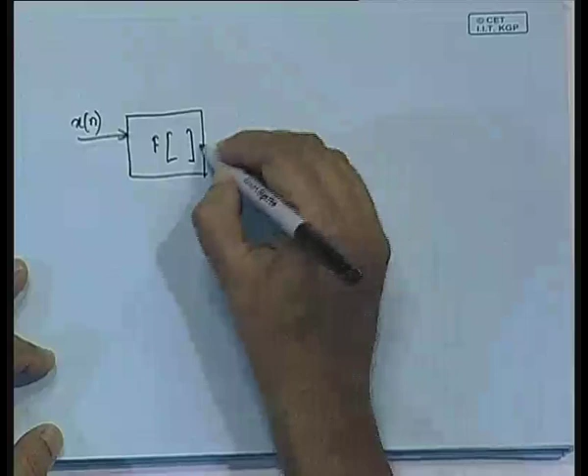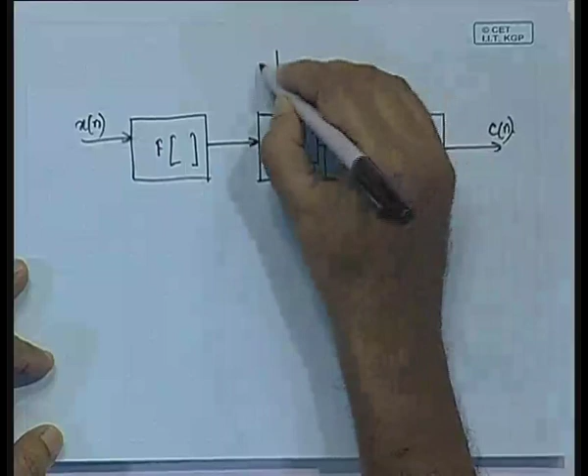So now we are going to have another logarithmic encoder decoder, but where the transfer characteristics is slightly altered. What we have is some kind of block diagram like this, where the input will be xn, and then we will be having a transformation function which we call f, which will be a logarithmic function basically, followed by the quantizer which we are calling the q function, and then we follow it up with the encoder, and the encoded output will give us C of n, and there will be the step size. So the step size, which is delta, will be controlling both the quantizer as well as the encoder.

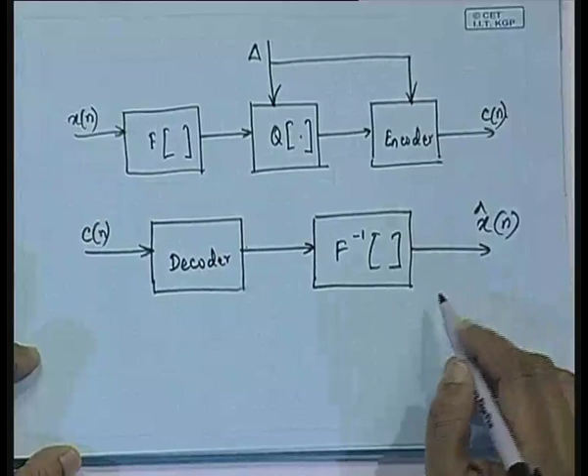And in fact, the corresponding decoder will have input Cn, followed by the decoder, and then we are going to have the inverse transformation. So whatever f we are using, we have to use f inverse of this, and that will generate x cap of n, which is going to be our reconstructed signal. So x of n is the original input, and x cap of n is the reconstructed output at the decoder end.

So now we have to see what f function one can use instead of using the direct logarithm. Earlier we were saying we will be using log of the modulus of xn, and we will also be deriving the sign of xn, but instead now we are going to consider a function which will take care of the deficiencies like utilizing the dynamic range as well as the approximation to the logarithmic characteristic.

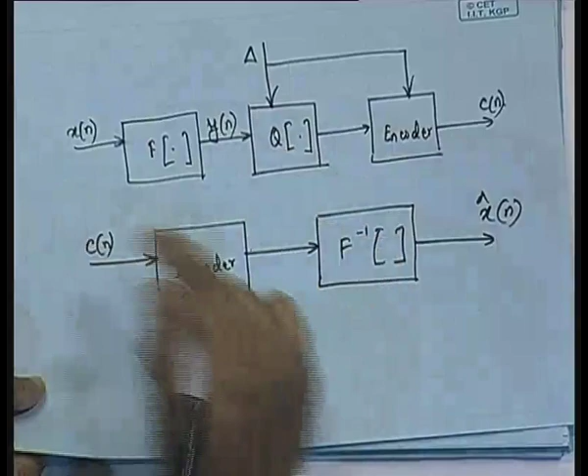So the transformation f that we design is like this: we say y of n will be nothing but the output of this f. We write y of n as f of xn, and this is given by x max, which is the maximum possible amplitude of the signal, multiplied by log of 1 plus mu into mod of xn divided by x max, upon log of 1 plus mu, and this multiplied by the sign of xn, where sign of xn equals plus 1 if xn is positive and minus 1 if xn is negative.

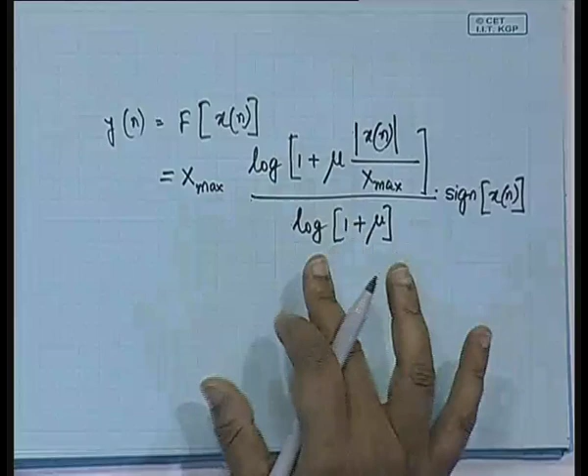So this is the expression, and this is actually called the mu law. So as per the mu law characteristic, the transformation f would be like this. Now you can examine this equation: yn equals x max multiplied by this expression. Let's call that equation 1, and you can see that if we substitute mu equal to 0 directly, we get a 0 by 0 form.

So if we mathematically manipulate that by taking the derivative of the numerator and the denominator, what we derive is simply this: for mu equal to 0, we get yn equal to mod of xn into sign of xn. The x max term gets cancelled ultimately. There is one x max term here and another x max term here, and this x max term will ultimately come to the denominator. So you will be left with mod of xn multiplied by sign of xn, which is nothing but xn. So yn is equal to xn.

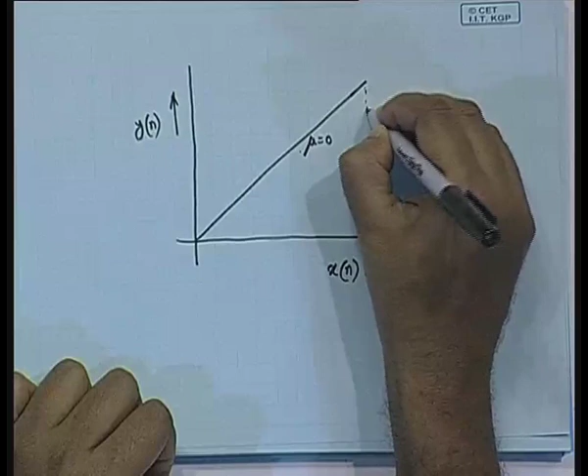So at mu equal to 0, the characteristic that we will obtain if we plot yn versus xn will be a completely linear characteristic passing through the origin, with a 45-degree slope. So if you are plotting xn values in this direction and yn values in this direction, then yn is going to be equal to xn. This is the curve we will have for mu equal to 0. So somewhere at this point, let's say we have the maximum possible value of xn, that is x max. So when xn is equal to x max, likewise yn also will be equal to x max according to this.

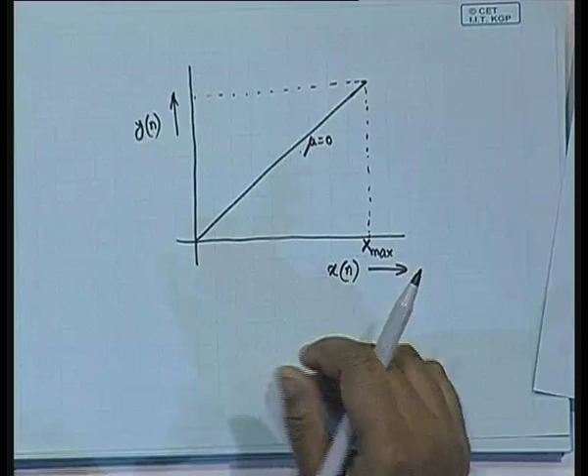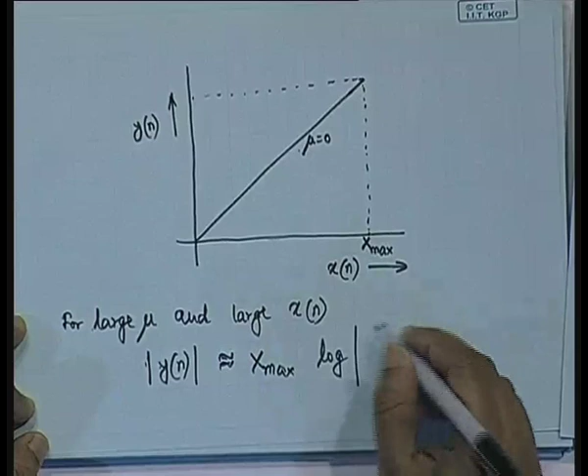Now if we go by this equation and try to plot the yn versus xn curve for different values of mu, we will be obtaining it like this. This was for mu equal to 0, and we can go to another extreme, that is for very large mu. For large values of mu, if we plot this equation, and also take the larger value of xn, meaning xn closer to x max as compared to xn closer to 0, so when we take large mu and large xn, this gives rise to an approximation in the value of yn, and we can write that mod of yn is approximately equal to x max into log of mod xn upon x max.

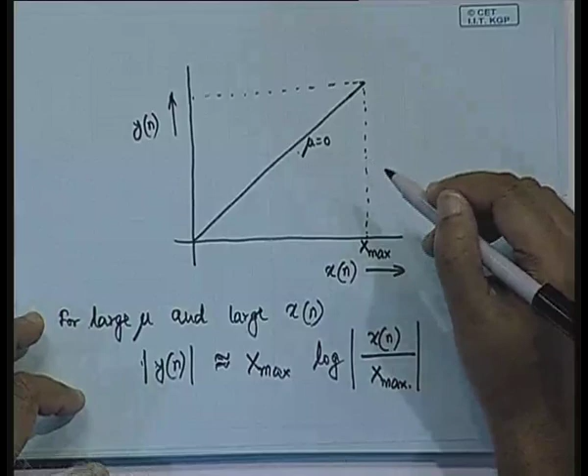So this is for large mu, and if we directly go by the plot corresponding to equation number 1, we will obtain characteristics something like this: for increased value of mu, what do we expect? Should the curve be like this or should it be like this? Because this will approximate the logarithmic characteristics more, so this will be upward. So we will have a characteristic like this for, let's say, mu equal to 5, which may lie above the mu equal to 0 characteristic. Mu equal to 0 is actually the case of no compression. There is no signal compression happening, because whatever is the value of xn, yn has the same value. Whereas here, for these values of xn, the incremental change in yn is much smaller.

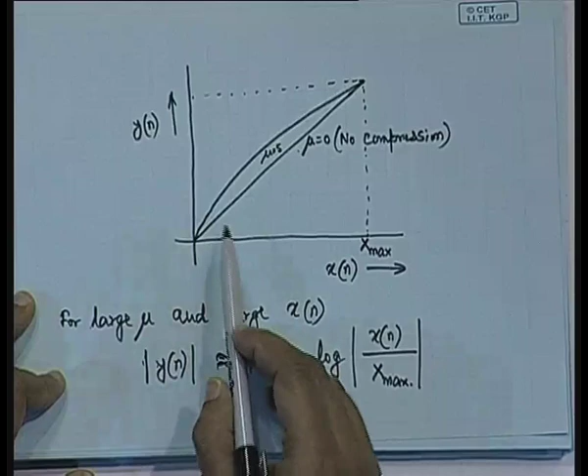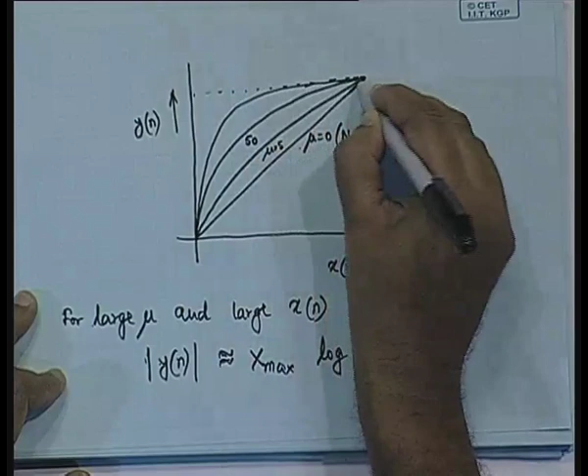And if we increase the value of mu further, we will observe a characteristic like this. So for mu equal to 50, we may observe a curve like this. For mu equal to 255, we may have a curve like this. So for large values of mu, we will have curves like this. This is a typical characteristic that we obtain, this is x max, for yn versus xn for different values of mu.

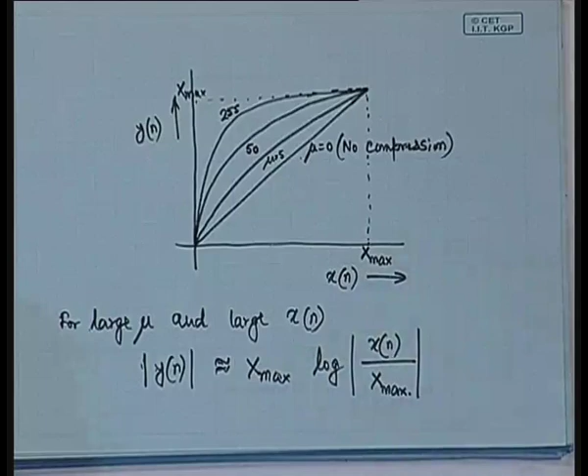Now in terms of the characteristics, one can observe that if we plot the value of x cap n versus xn — x cap n meaning at this point, when we quantize it — so this was yn, after the transformation, and after the quantization we call it x cap of n. So if we plot x cap of n against xn, plotting xn in this direction and x cap n in this direction, we will observe a nature very similar to what we just showed for yn versus xn, because it is ultimately yn which gets quantized, not xn directly.

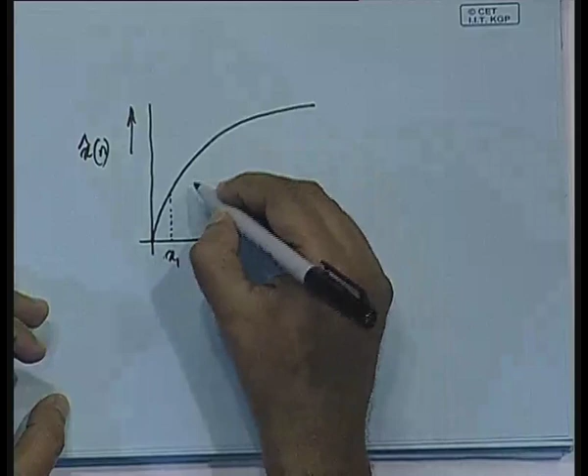And for different values of xn, corresponding to the decision levels — if we mark the decision levels corresponding to xn, we will observe, suppose this is x1, this is x2, this is x3, and this is the value of the ultimate x max.

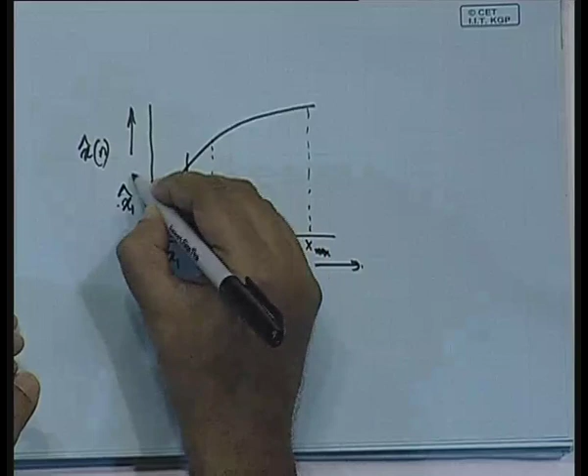Okay, and we will be observing that the value of x cap would be something like this. Here we will be observing the x1 cap. So x1 cap would go like this, and then we will be observing this to be the x2 cap. This will be the x3 cap.

Then we will finally be having some more intermediate levels like this, but let us say it is just having 1, 2, 3, 4 levels on this side. And in fact this will not be 4 level, this will be 8 level.

Why 8 levels? Because the signal is a bipolar signal. So x of n can have samples which are positive, can have samples which are negative. So the actual range will be minus x max to plus x max.

So since we are having 4 levels in this example corresponding to the positive signal, we will correspondingly be having 4 levels for the negative signals as well. And this characteristic will be

antisymmetric about the origin. So if we just make an antisymmetric version of this curve and then we plot x cap n over its range from minus x max to x max, and just extend the characteristic in the negative direction with antisymmetry, then what results is 8 different quantization levels. That is what we will be obtaining.

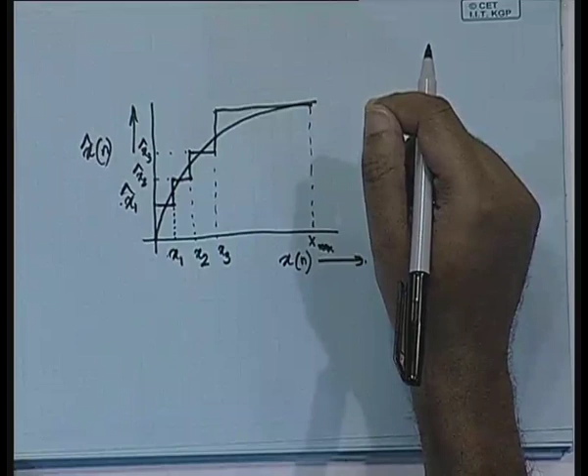So now with a characteristic like this, when we have x cap n versus xn being plotted this way, now we can derive the expression for the signal to noise ratio in a manner very similar to what we did earlier for the uniform quantizers.

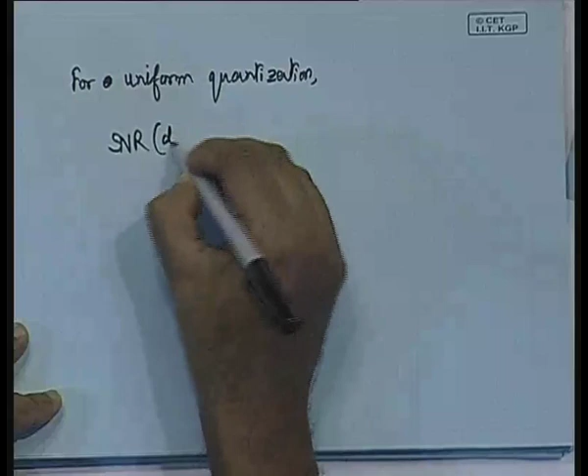For uniform quantizers, as you remember, we had obtained the signal to noise ratio, which I am just reproducing for your reference: the SNR in dB was equal to 6B plus 4.77, minus 20 log to the base 10 of x max divided by sigma x.

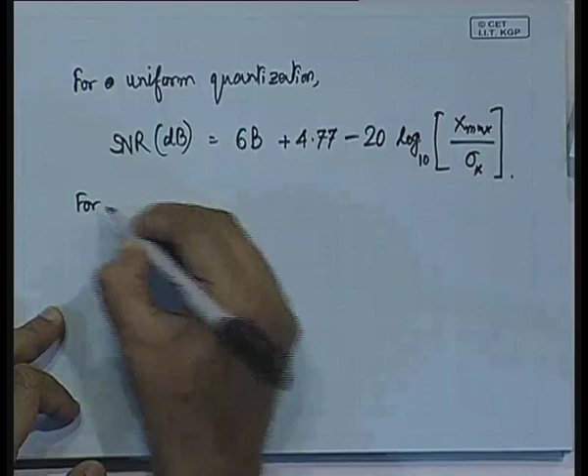And for mu law quantization, what we are describing here, if we are following a similar derivation approach, then one observes the SNR in dB to be like this: SNR expressed as dB is equal to 6B plus 4.77. So up to this the terms are equal, but not beyond this.

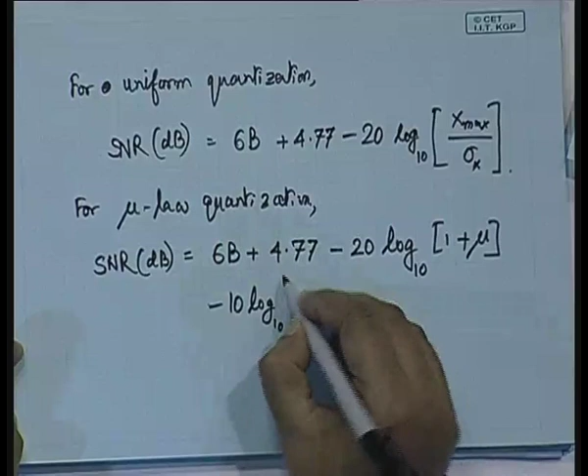After this there will be a term that is 20 log to the base 10 of 1 plus mu, minus 10 log to the base 10 of 1 plus x max upon mu sigma x, this term squared, plus root 2 into x max upon mu sigma x. So this is going to be the total expression.

So you can compare these two equations, and here you will find that in the uniform quantizer case there is a direct term, 20 log of x max by sigma x. In fact this is the term which we criticized, because we said that if sigma x happens to be small, if the ratio of sigma x by x max happens to be small, then we are going to have a reduction in the signal to noise ratio.

Now, in this case also there is a reduction. Firstly, there are two terms which are contributing to the reduction. One is this minus 20 log of 1 plus mu, but for a particular design of the quantizer, mu is fixed, so this is a constant quantity which will be subtracted. We are not bothered about that, but we are more bothered about the term that is signal dependent, the sigma x term.

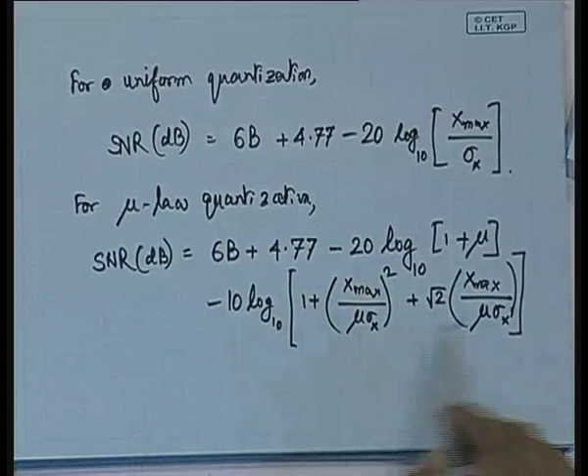So you can see that x max by mu sigma x, this is squared, so if this is a small quantity, it is further reduced, and this term is much less sensitive to this variation in x max by mu sigma x. In fact, mu also happens to be a larger quantity, so as a result of this, the term that is going inside this logarithmic argument is not very sensitive.

As a result of that, if we plot the signal to noise ratio against the quantity x max by sigma x, we will be finding much less variation for one case, whereas in the other case we will be observing a fall, although it is a logarithmic fall. So now it's better to plot the two situations, that is uniform quantizer and mu law quantization.

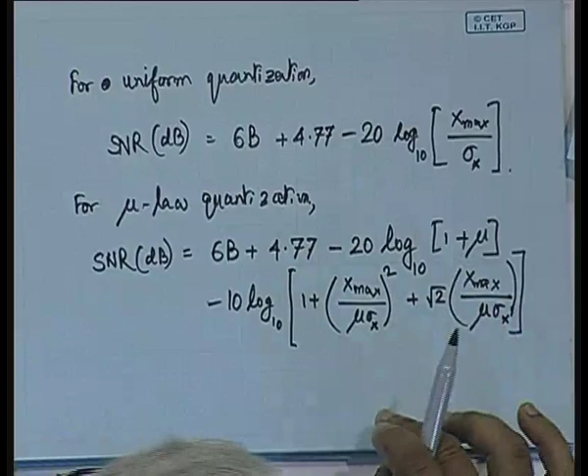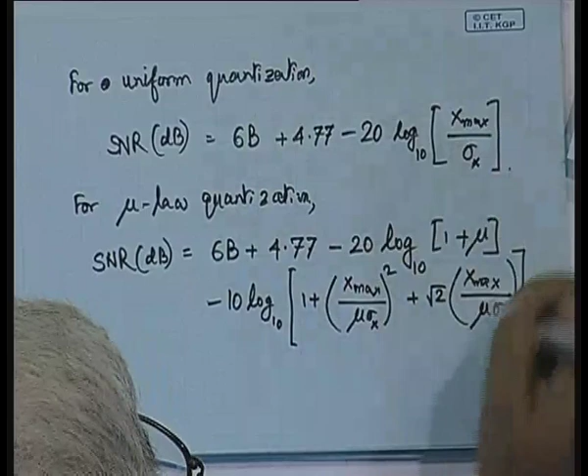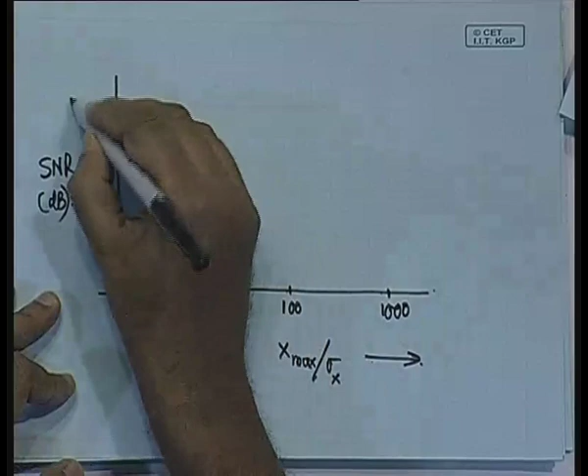So we will be having, let us say here we have 100 and here we have 1000, because we are going to plot it in the logarithmic scale. So x max by sigma x is plotted like this, and the SNR is plotted this way. Then we will be having, for b equal to 5 let us say, you see that it is still dependent upon b, the number of bits.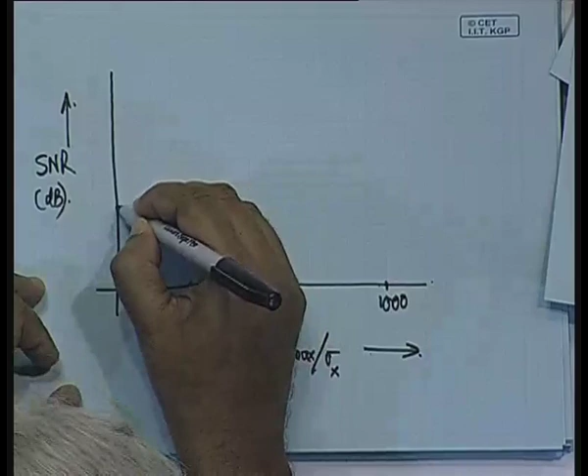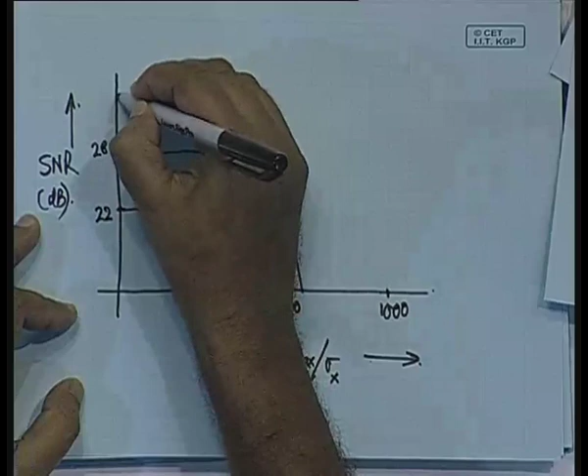Here it is 22, and we can see that it is like this. So this is for b equal to 5, and then we will be observing that b equal to 6 would be something like this. This is for b equal to 6, and for b equal to 7, this starts from 34 dB onwards, and then we are observing it like this.

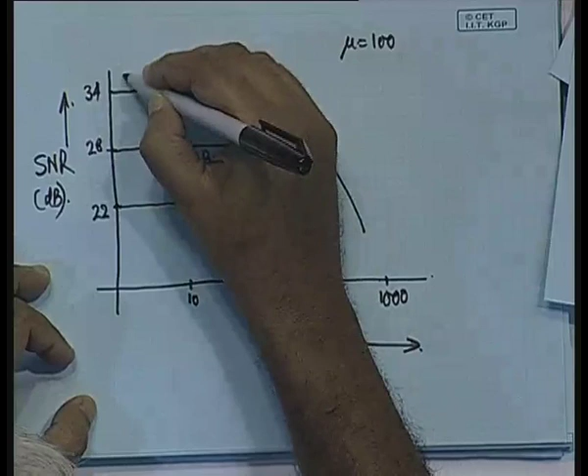So this is for mu equal to 100, and we can see that the variation is something of this nature, for b equal to 5, and then for b equal to 6.

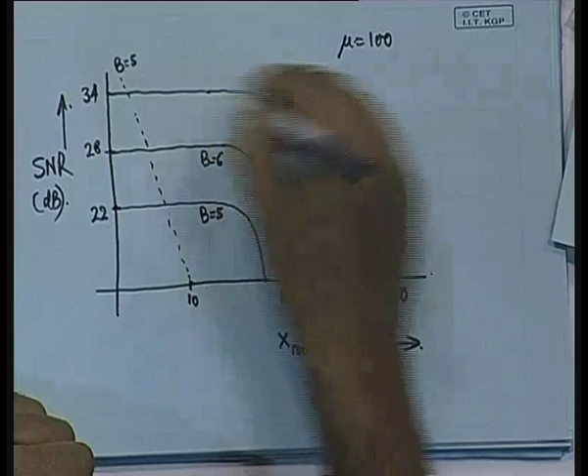So this is for the case of uniform quantization. This will be the characteristic for b equal to 7. And these solid lines are all for the mu law, while for the uniform quantization, again because we are plotting in the logarithmic scale, and the expression of SNR also is logarithmically changing, we can expect a straight line for the uniform quantization.

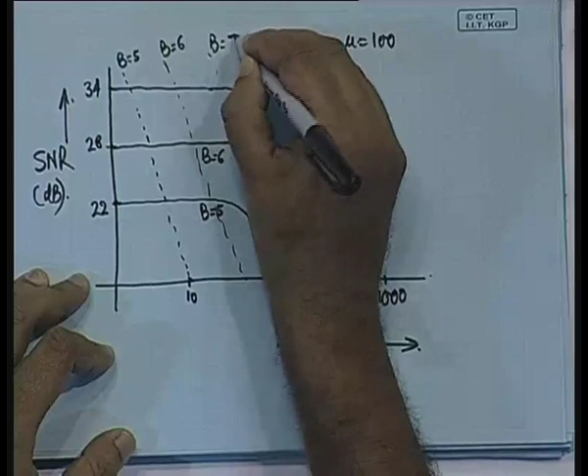So you can see that the b equal to 5 characteristic would be like this, and b equal to 6 characteristic may be like this. B equal to 7 characteristic could be like this, and b equal to 11 characteristic could be like this. So all these dotted lines are for uniform quantization.

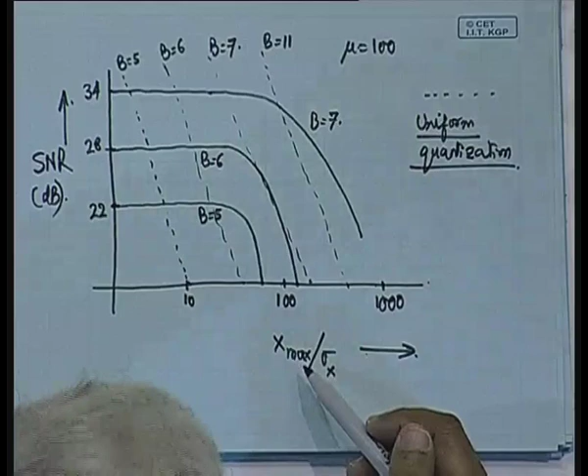So now, what is the conclusion we can draw out of it? For a lower value of x max by sigma x, meaning the value of sigma x is closer to x max, meaning for very large signal variance, we can see that the uniform quantizer is having a much higher value of signal to noise ratio. It's having a much better SNR. Just look at this point.

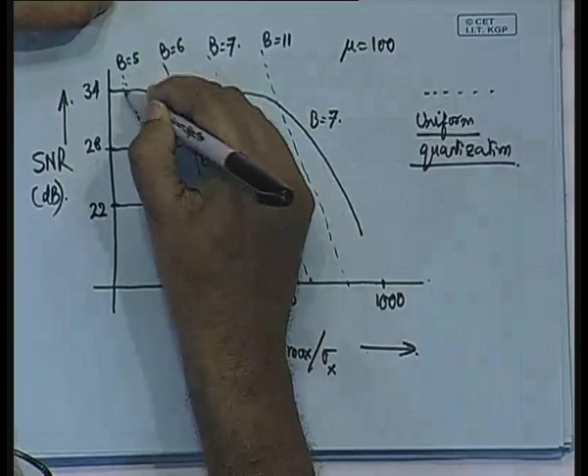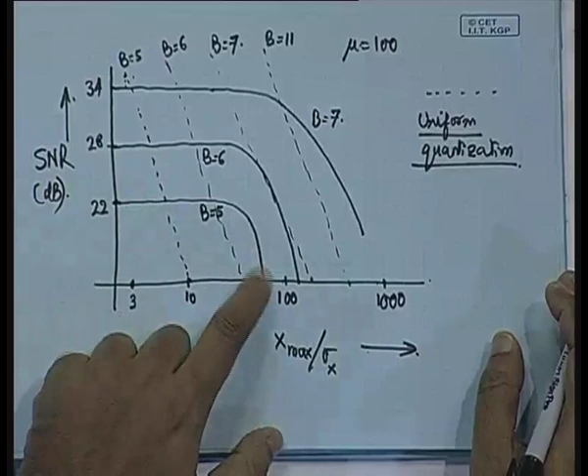Here for b equal to 5, and for a very low value, maybe 2 or 3, of x max by sigma x over here, you can see that the b equal to 5 curve happens to be at a much higher level as compared to the b equal to 5 curve for the mu law. So definitely it leads to the conclusion that this is better.

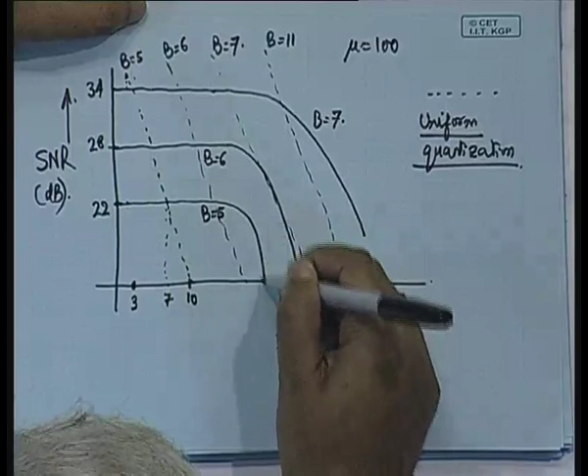But again, for the variation of sigma x, once it crosses this point, maybe this is with x max by sigma x at a value of 7, and beyond that we find that this uniform quantization curve falls rapidly. So in this case for b equal to 5, the mu law characteristic gives a much better SNR, and it is more or less constant. It is only beyond a certain stage that for further larger values of x max by sigma x we find a fall off.

In fact, this is quite expected also from this equation. Look at this equation, that if x max by mu sigma x happens to be sufficiently large, only then will there be some fall in the characteristics. So this is what is happening for the mu law quantized version.

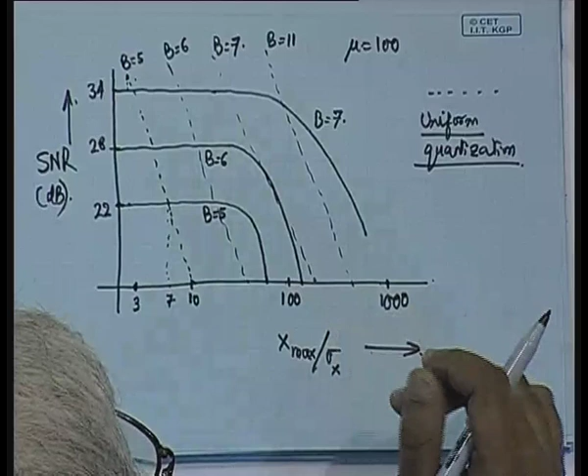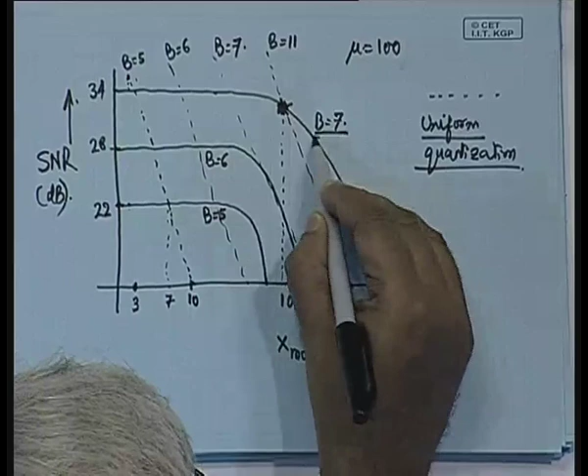Very interestingly, for a reasonably higher value of x max by sigma x, which is typically expected, you can see that near about 100 we are finding that the SNR is almost the same. Whatever value we are expecting with only 7 bits for mu law, we are having the SNR equal to that of b equal to 11.

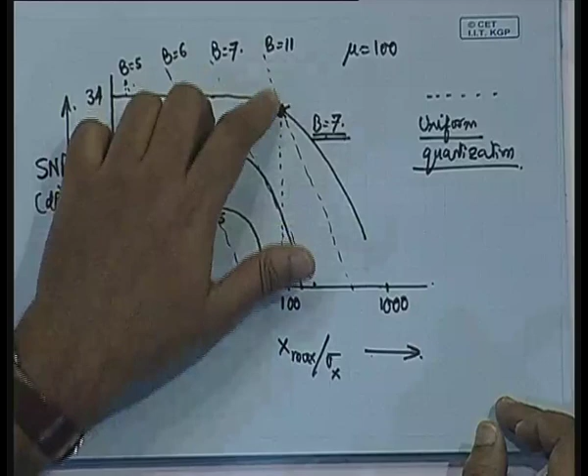This suggests that for the case of mu law, we can go in for much lesser number of bits as compared to what we will be doing for the uniform quantization.

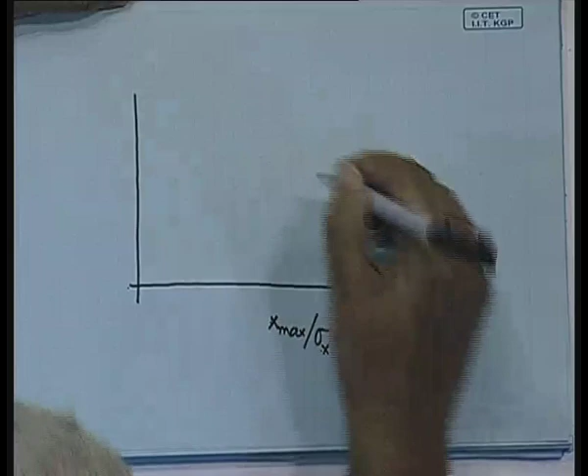And then we can have a very similar plot for a higher value of mu. Let's say that we plot the same thing for mu equal to 500, and in that case, what are we going to obtain? So this is for mu equal to 500.

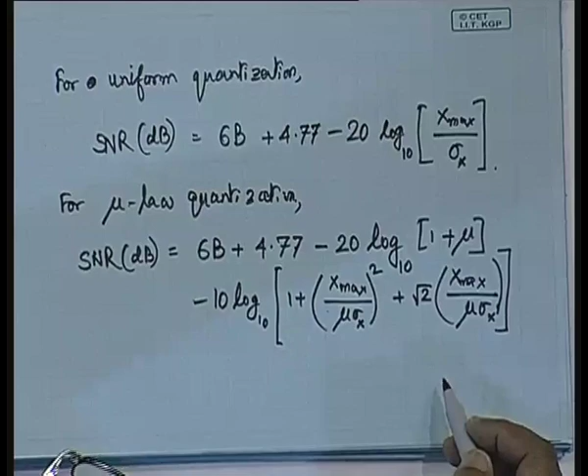Now look at this equation and tell me that if the value of mu is higher, instead of 100 if we make it 500, what would you expect out of the SNR value? SNR will drop down. Going by this equation, the SNR will drop down. From 100 to 500, using the actual values, we will find that the SNR drops down by nearly 2.5 to 3 dB.

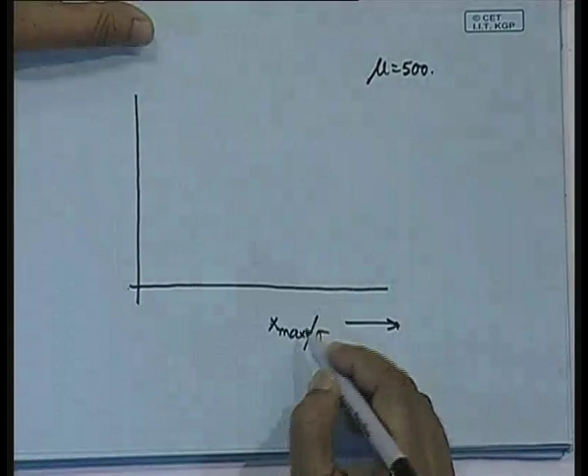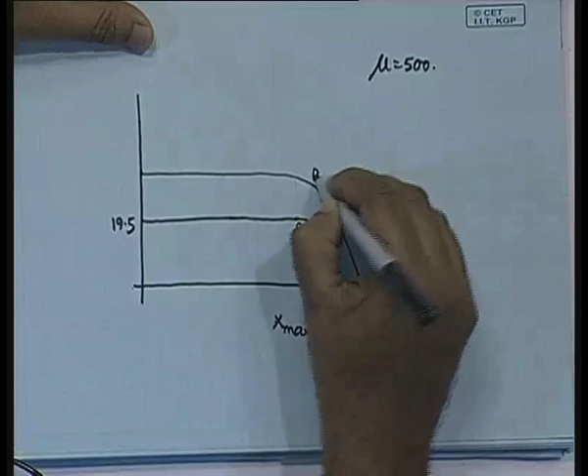So here we will observe that it will be at 19.5 and then it drops down much later. This is for B equal to 5, and for B equal to 6 it would be like this. For B equal to 7 it would be like this. The values, instead of 22, has come down to 19.5; here this has come down to 25.5 dB; and here it has come down to 31.5 dB. A uniform drop of 2.5 dB has happened.

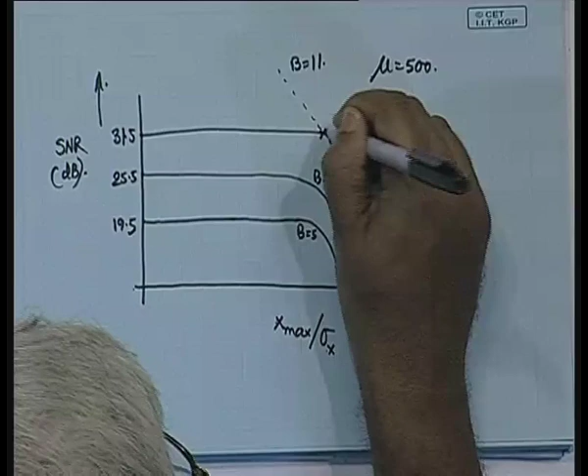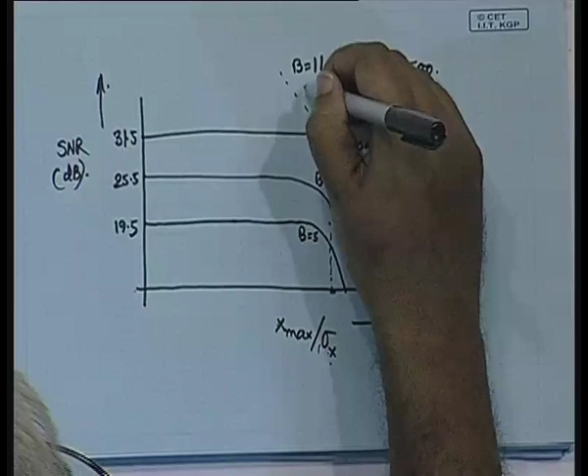And then again, for B equal to 11, we can see that the characteristic makes an intersection at this particular point, which means that beyond this value of x max by sigma x, we are going to find that mu law gives us a better characteristic. In fact, it won't intersect at two places, it will be something like this, not exactly what I have shown. So beyond this value of x max by sigma x, we find that mu law is going to perform better, whereas for smaller values of x max by sigma x, the uniform quantizer is going to perform better.

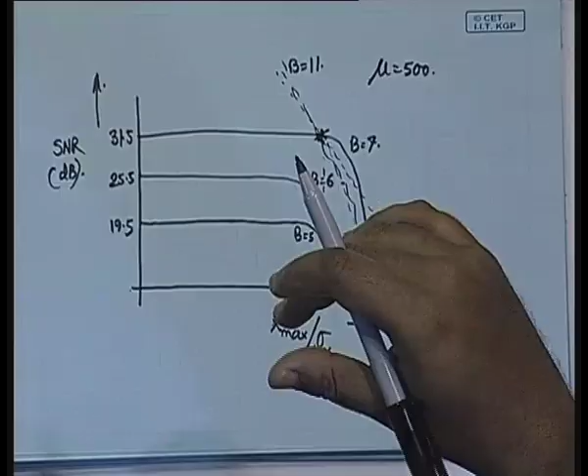But this means to say that although we may be having a better signal to noise ratio for the uniform quantizer case, and the signal to noise ratio in this case suffers somewhat, the nature of the characteristic being totally uniform with respect to this helps a lot.

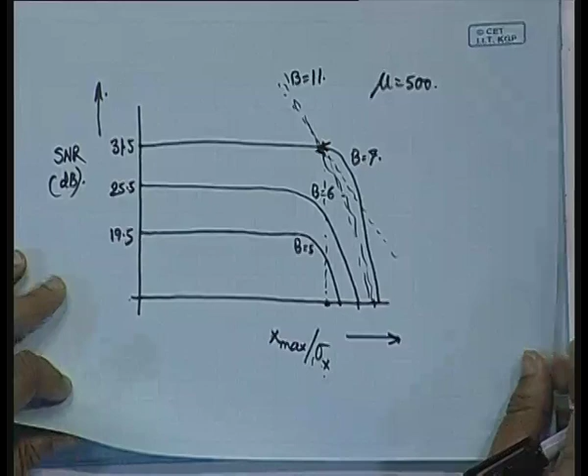Now, so now we can go in for the case of the optimum quantizer. This mu law quantizer achieves a constant SNR over a wide range of signal variance. Now there is some sacrifice in the signal to noise ratio performance, but instead, if we consider the design of optimal quantizers...

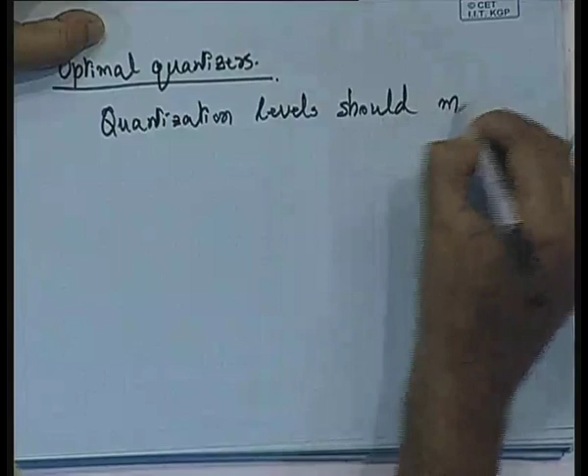In the case of optimal quantizers, what we should do is that the quantization levels should match the signal variance. And how do we do that?

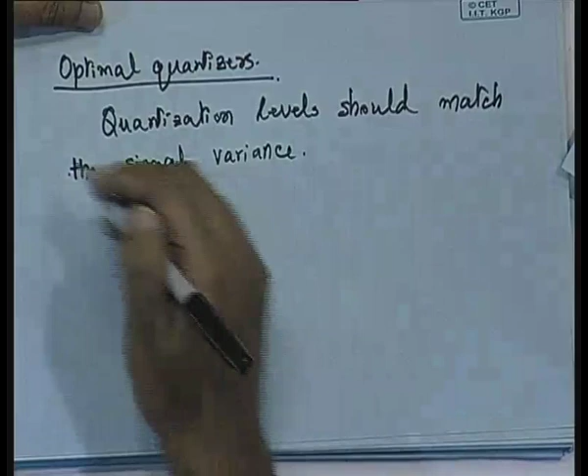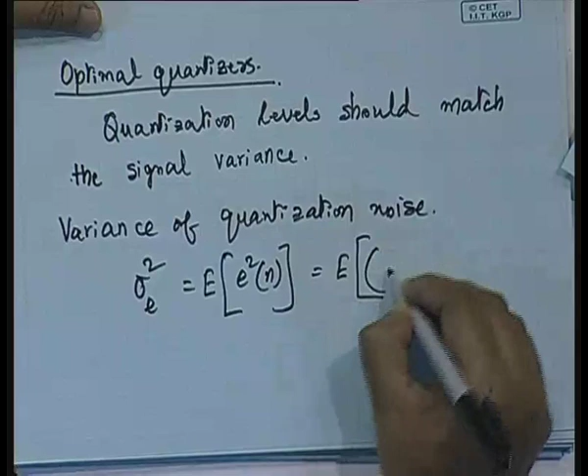First thing is that the variance of the quantization noise, that we can write like this: it is given by sigma square E equal to the expectation of E square n, and this is equal to E of x cap n minus xn whole square. Let us call this equation number 2.

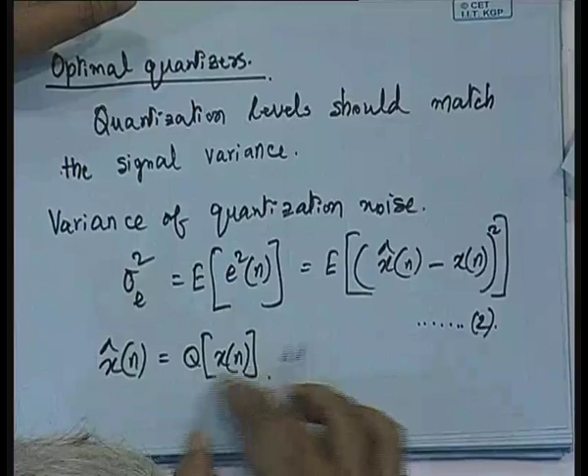And in this case x cap n is equal to the quantized version, that is q of xn, for an optimal quantizer. That means xn will be directly followed by the quantizer, we are not using any other transformation. So it is just xn followed by the quantizer. So x cap n, the quantized value, is q of xn.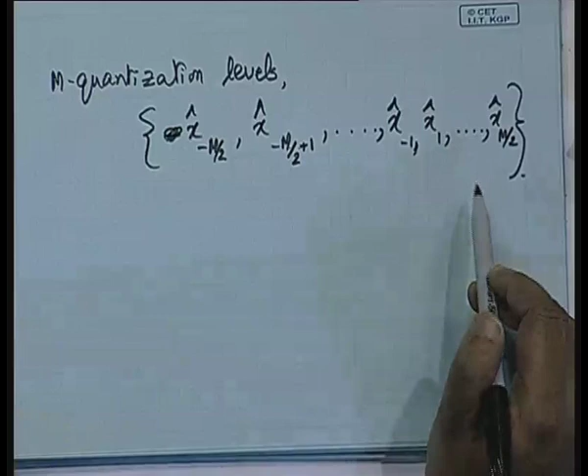And in general we will be having m quantization levels. So if we use m quantization levels, in that case we are going to have x cap of minus m by 2, x cap of minus m by 2 plus 1, so on, x cap minus 1, then x cap 1 up to x cap m by 2. These are the set of m different quantization levels. Now, what we do is that m will be considered to be an even number.

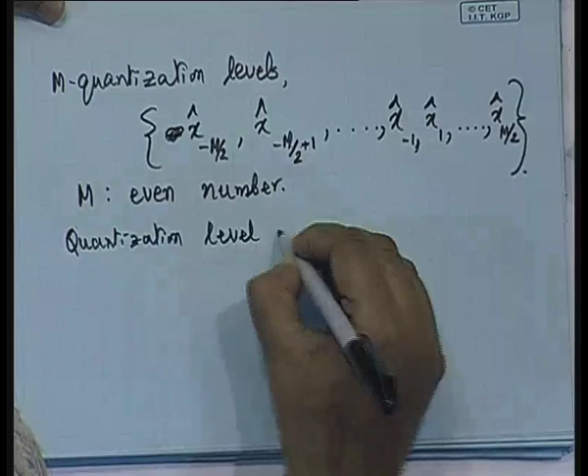And the quantization level that is associated with the interval xj minus 1 to xj is denoted by x cap j.

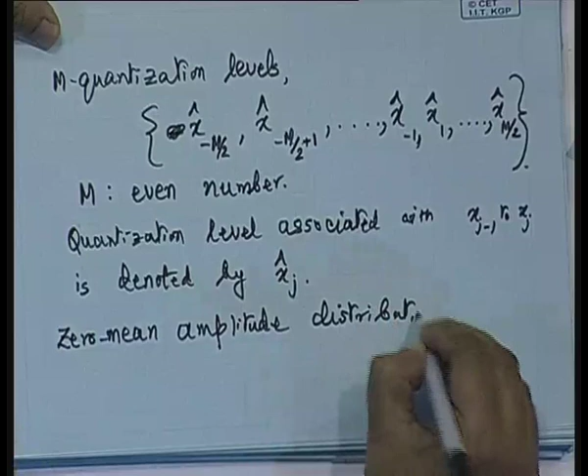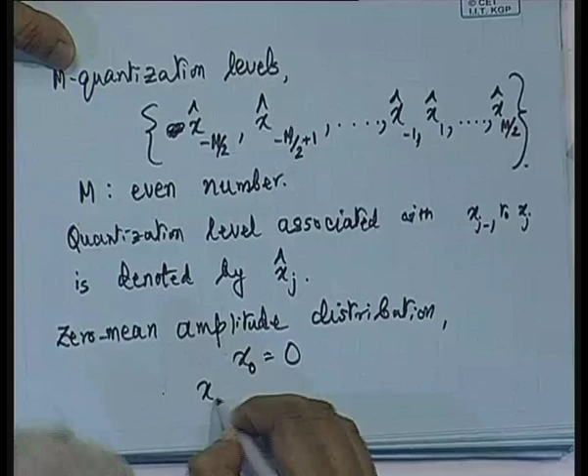Now, when we have a zero mean amplitude distribution, we can define that x0 will be equal to 0. Furthermore, if we assume that the density function is non-zero for very large values of x, this happens when we have the Laplacian PDF or a Gaussian PDF, where it reaches zero value only at infinity. So, if the density function is non-zero for large amplitude, we can also assume that x plus or minus m by 2, that is this level and this level, are being set as plus minus infinity.

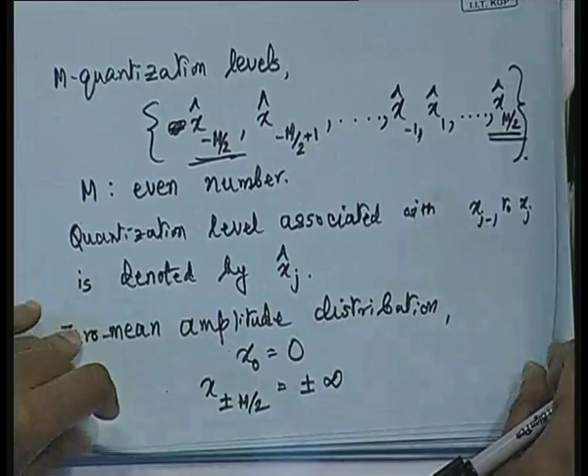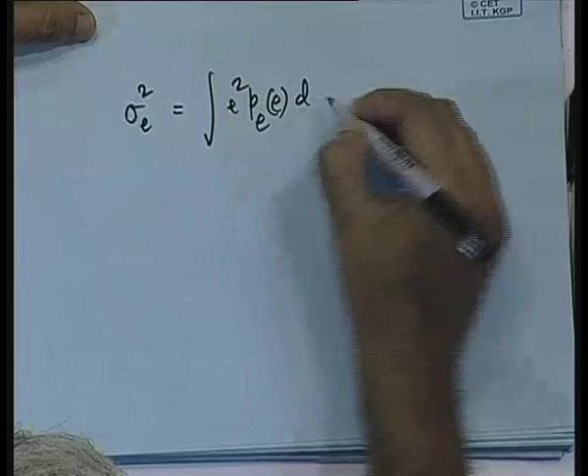Now, with this assumption we can write down the variance. The variance is the expectation of x cap n minus xn squared, and this quantity x cap n minus xn whole square is nothing but e square of n. When we have these two assumptions, that is the zero mean amplitude distribution, and for large amplitudes we are going to have non-zero values, we can write down sigma square E as the expectation, which can be written as the integral of E square times the probability density function of the error, PE of E. This directly follows from here when we incorporate this assumption.

Now, if we plot the error quantity E against X, we are going to have some kind of situation like this: supposing this is X0, and if this is X1, X2, like that, and on the other side we have X of -1 and X of -2 -- all these different decision levels. Corresponding to these decision levels we are going to have the value of the quantizer making a discontinuity. The error term will lead to a discontinuity corresponding to the case when X equals X0, or X equals X1, or X equals X2, at those points.

Again, midway between X0 and X1, what is the value of the error? That is also going to be 0 at the midpoints. That means if we take X0 plus X1 by 2, or X1 plus X2 by 2, at these points the value of the error is going to be 0. But when the signal just reaches X0, it is making a transition from the negative error to the positive error. Again at this point it becomes 0, meaning from the positive error it drops. Beyond this, if we increase the value of X further, we are going to have a negative error, and then at the value of X1 it again makes a transition.

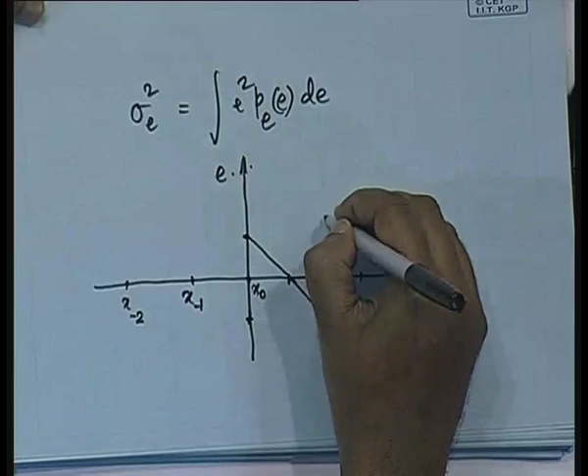If it is a uniform quantizer, then all these levels would be the same. But in the case of non-uniform quantization, we are going to have a characteristic which may look like this. Extending the same thing on the negative side, we are going to see some kind of error characteristic which would look similar, more like the midway point, and here it will be X of -2. So the error versus X characteristic would be something like this -- this is the quantization error versus X.

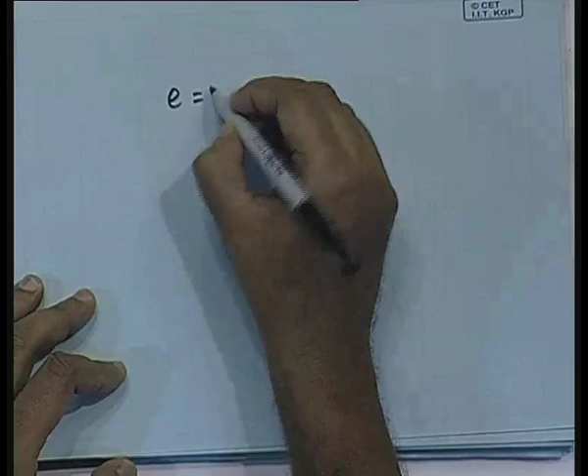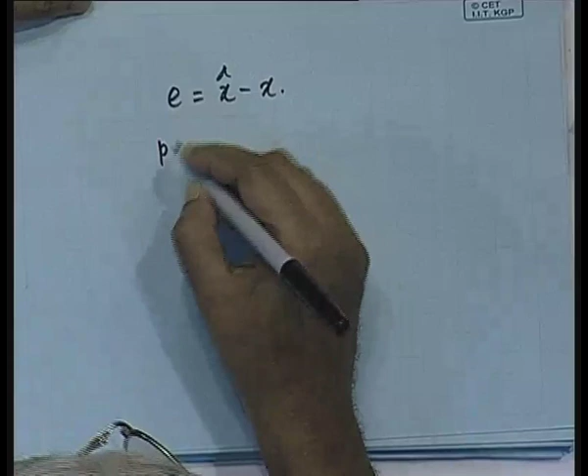Now we can write down the error. The error is nothing but X cap minus X, and by making a substitution with E equal to X cap minus X, we can write the probability density function of error PE of E as PE of X cap minus X. By change of variable this can be written as P of X by X cap, into X by X cap, and this could be defined as Px of X.

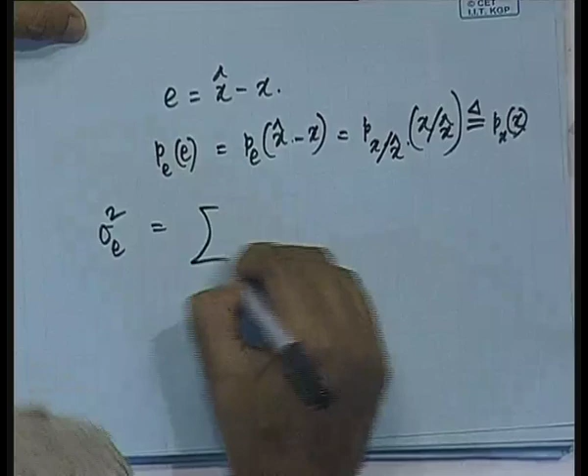So as a result of this, we can write down sigma square E as the summation, i is equal to minus m by 2 plus 1 to m by 2, of the integral of x from xi minus 1 to xi, of xi cap minus x whole square, into px dx. This is by direct substitution of this equation.

So this was the earlier integral equation. What you had seen was in terms of PE, so it was E square PE dE, and instead, by change of variable, we have made it so the E square remains as it is, but it is changed to PX dx. Now what we have to do is that this variance term, this error variance term, this noise variance term, has to be minimized.

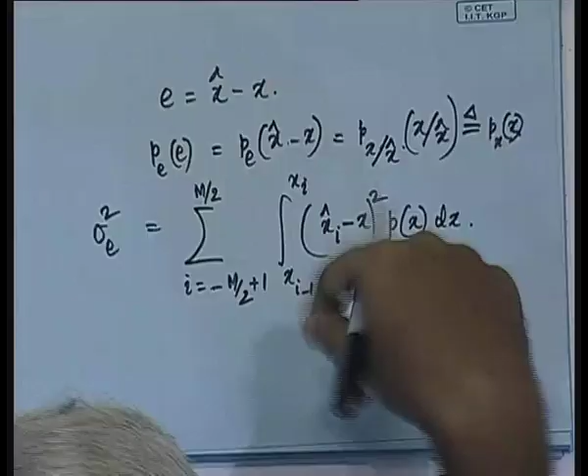With respect to what? Now we have to design the quantizer. So designing the quantizer means what are the decisions that we have to make? We have to make the decision about x1 to x m by 2. So all the decision levels have to be decided, and then all the reconstruction levels also are to be decided. So all these happen to be the variables, and what we have to do is differentiate this error term with respect to the individual quantities like these xi's, and if we differentiate that and equate them to 0, we are going to have a set of equations.

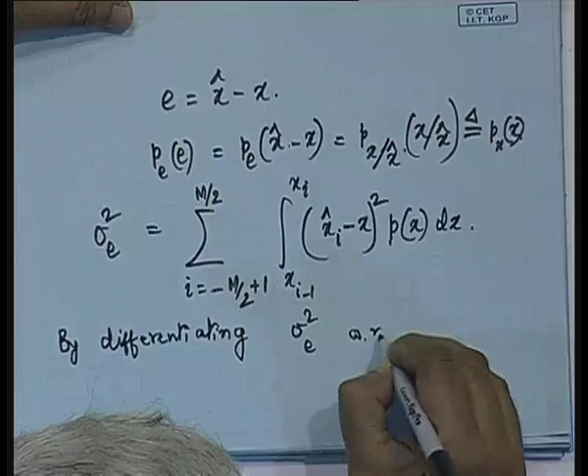So by differentiating sigma square E with respect to each parameter, we can get this set of equations: integral from xi minus 1 to xi of x cap minus x whole square px dx, that is equal to 0, for i equal to 1 up to m by 2. And then we are going to have xi equal to half of xi cap plus xi cap i plus 1, for i equal to 1 to m by 2 minus 1. And by our assumption we are having x0 equal to 0 and x plus or minus m by 2 equal to plus or minus infinity.

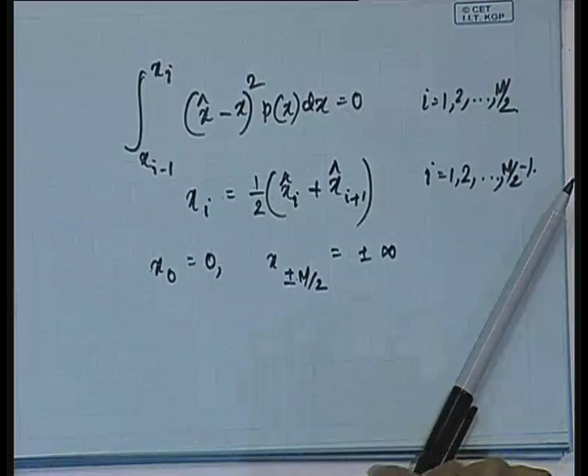Now if we solve these equations, we are going to find out the value of these decision levels and the reconstruction levels, and that gives us an optimum quantizer. Now the point that we have to discuss is, is optimum quantizer the best solution for speech coding?

Unfortunately not, because although the optimal quantizer is going to yield a better signal to noise ratio because it is matched with the signal variance, it performs poorly, especially when in between the speech waveforms we have got silence. So for speech signals the optimal quantizer may be okay, but whenever we have silence in between, the signal amplitude is already too small, and when the signal amplitude is too small, it makes a to and fro jump between the minimum quantization levels, between x1 cap and x cap minus 1.

And if the step size happens to be large, it is going to produce much larger error. Whereas in the case of the mu law compressor, one can design the step size for the minimum signal to be much smaller as compared to the step size for the larger signal. So as a result, for the silence duration, the change in the quantized levels will be much less for the mu law as compared to what we get for the optimum quantizer. So although it is called optimum quantizer, for the speech signal let us remember that mu law is going to serve with the best performance, because it is also taking care of the non-speech condition, that is, when the silent case is considered, it is going to be much better.